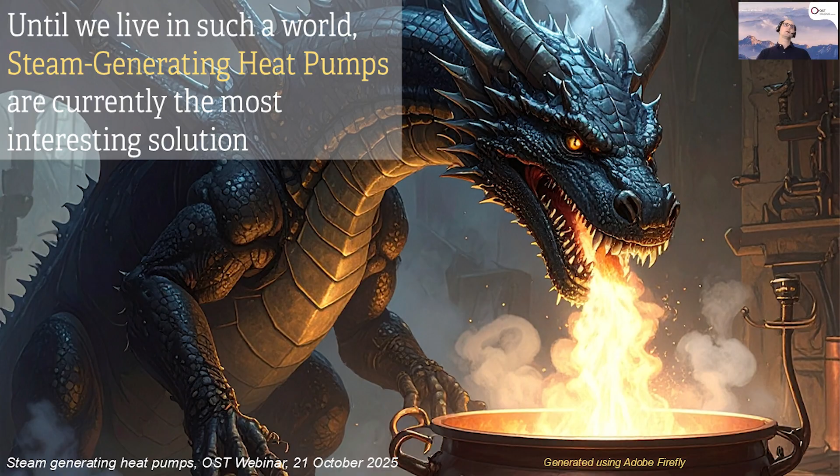Let's start this webinar with my short introduction. We're really happy to present you today this interesting presentation of steam generating heat pumps. If, like me, you love the subject, I'm certain you will be satisfied with our webinar. And if you're not familiar with steam generating heat pumps, I hope you can be as enthusiastic about it as me by the end of the day.

My introduction will be short. I will speak 2 slides about this webinar, then present our Applied Science University, OST, and our Institute for Energy Systems, and then go through the agenda.

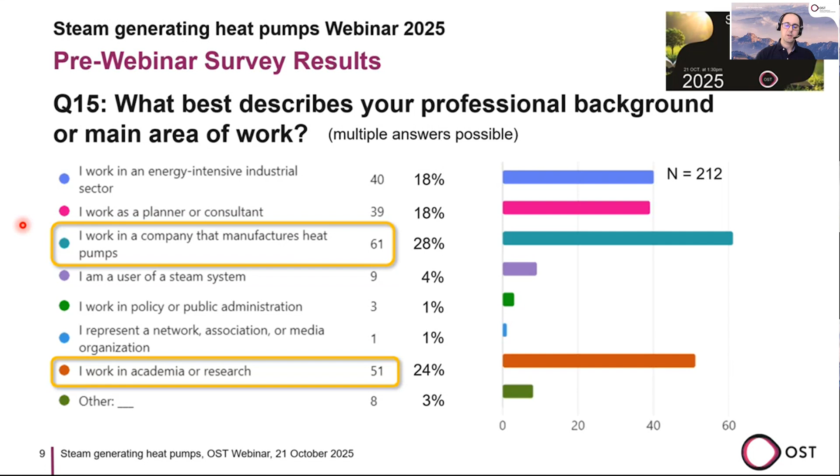I'm really thrilled to see as well around 20% of people following today working as planners and consultants, because I think they are really key people to help speed up the decarbonization of the industrial sector. Most of you are familiar with heat pump technology, or somewhat familiar, so I'm really happy, because that's exactly the audience we were trying to reach.

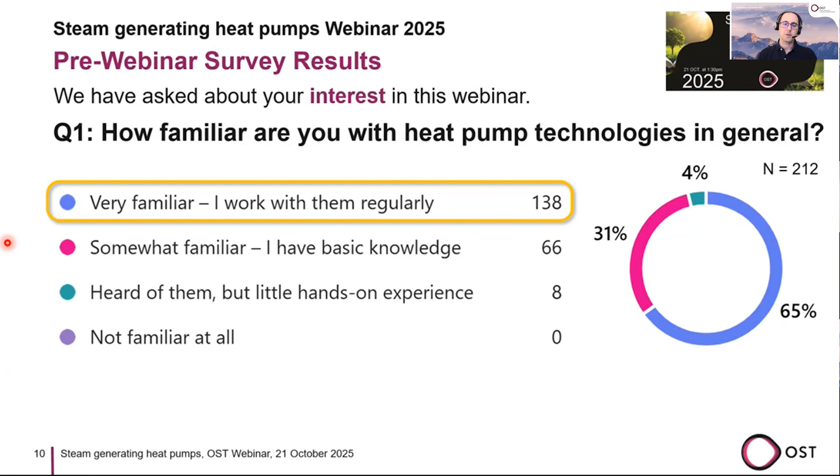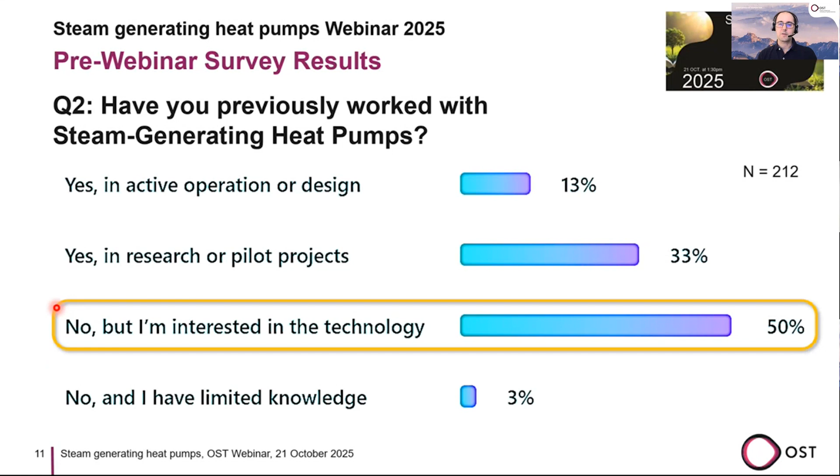If you're among the few percent who don't really know heat pumps, maybe it will be a bit too quick, but I think most people here today will be happy with our content. In terms of specific steam generating heat pumps, most people haven't worked with them, but they are really interesting, so I think this is perfect.

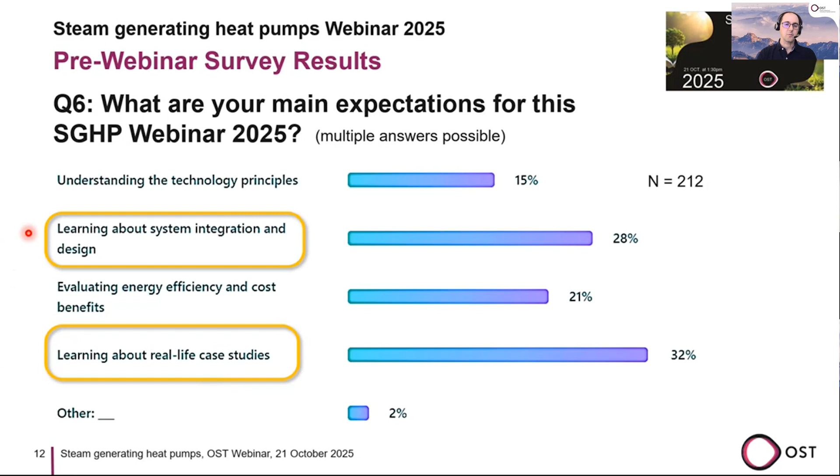What you're looking for in this webinar is learning about real case studies. You will learn about it, so I'm really happy, and I'm certain that you will appreciate today's presentation.

Let's present to you where I'm working. I'm part of OST, the Swiss Applied Science University, which has 3 campuses. The campus I'm working at, with a beautiful view, is in Buchs, which is really close to Liechtenstein, Germany, and Austria.

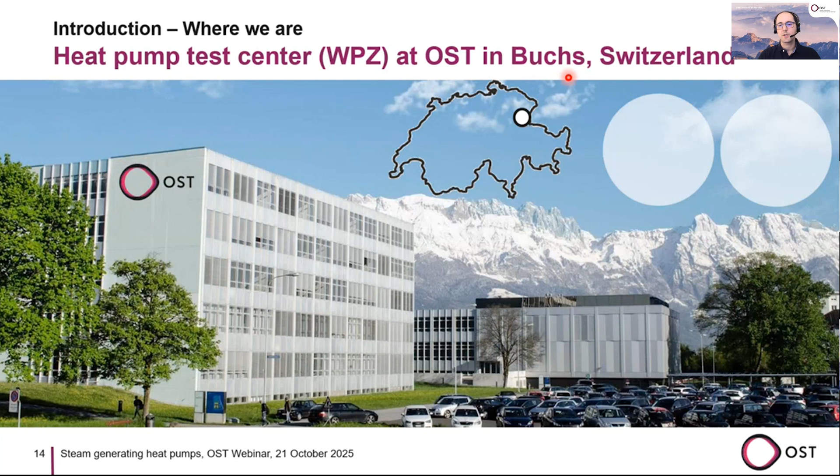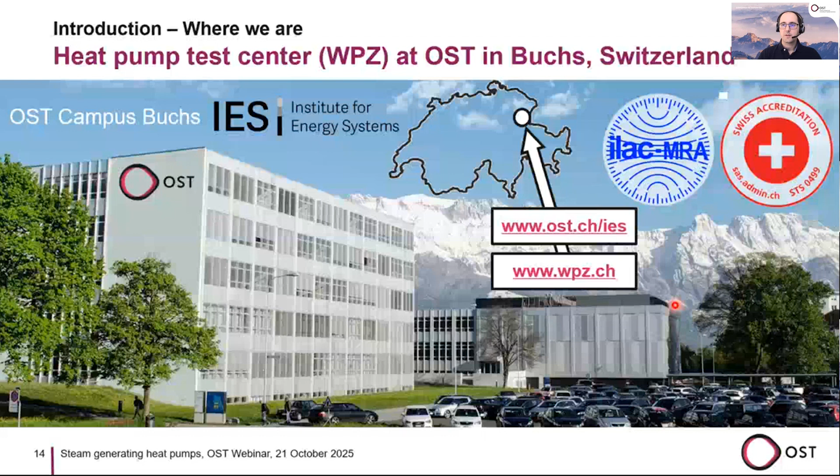In our institute we have 3 groups, one of which is the WPZ, Wärmepumpenzentrum, a heat pump test center which can do certification of residential heat pumps. We work mostly on 2 subjects: residential heat pumps and industrial heat pumps. The power electronics group specializes mostly in mobility, inductive chargers for high power applications such as trucks and cars. We also have people working in energy supply.

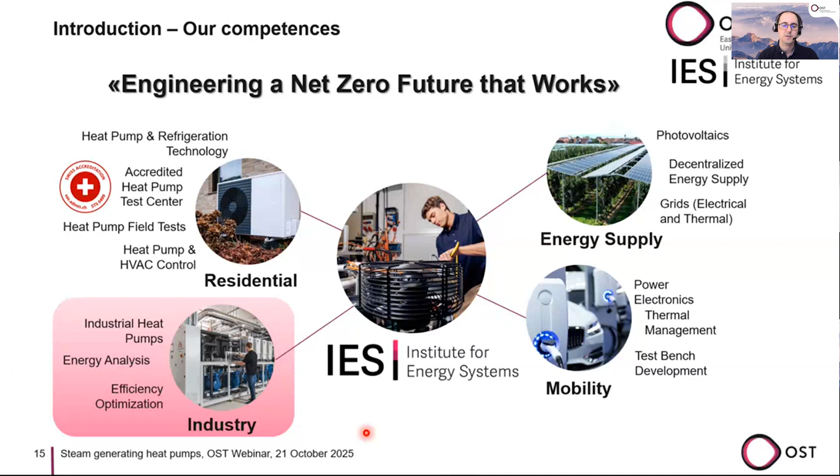Cordin and I have been working in this institute for 10 years on the theme of high temperature heat pumps and steam generating heat pumps for industrial sectors. What we do is mostly disseminate and teach. We do some measurement and testing, as well as advising and consulting mostly Swiss companies, and below that, we try to advance research in the domain.

For example, webinars in 2023 and 2024 - the videos are on the YouTube channel if you missed them, so feel free to have a look. We've also done a lot of presentations, some online, some at conferences, on the subject of high temperature heat pumps.

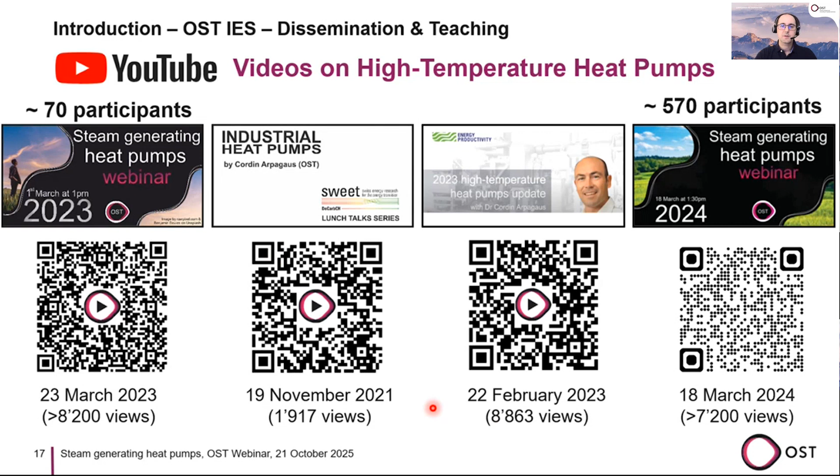In terms of teaching, we've been running for a few years a 4-day continuing education course on industrial heat pumps. It happens twice a year, once in German, once in English. The first 2 days are courses, also available online, which can be interesting for people abroad. The third day is a laboratory tour, and the last day is an excursion. It's a really interesting course that we developed at our institute.

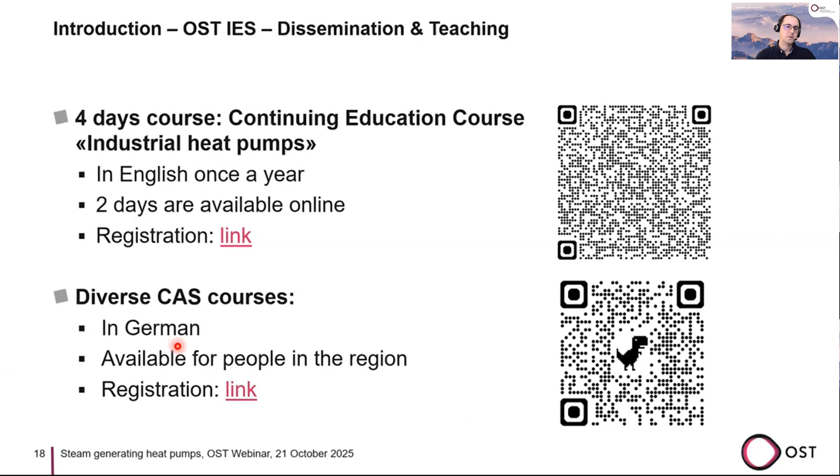For people living close to Buchs, the area where we are working, we also have diverse CAS, Certificate of Advanced Studies courses. Most of them are in German, and the link is provided there.

In terms of advising and consulting work, we just finished a Swiss-funded project called IntSGHP, integration of steam generating heat pumps, where I analyzed 3 Swiss companies, and you can see the results in the link when you download the presentation.

Cordin was part of the HTHP-CH, which was the pendant of Annex 58 on integration of high temperature heat pumps in Swiss industrial processes. They worked with 3 Swiss companies, Elsa, Cremo, HEIG-VD, and CSD Ingenieurs.

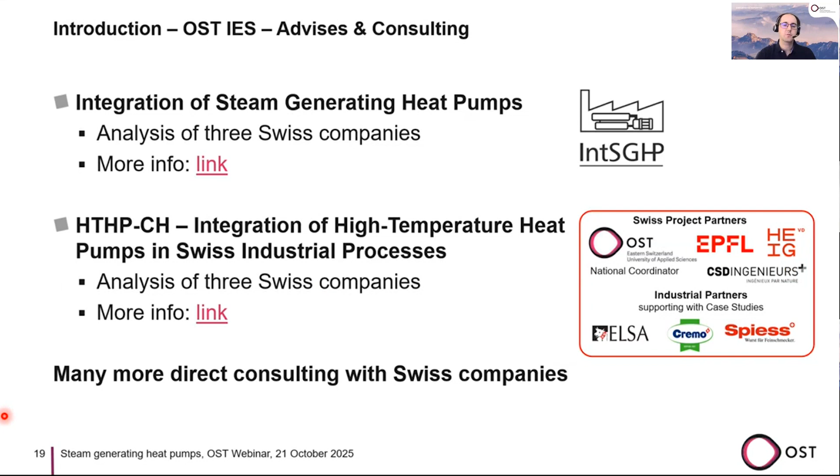In terms of measuring and testing, Cordin was one of the first who published high temperature heat pump results up to 150 using this HFO.

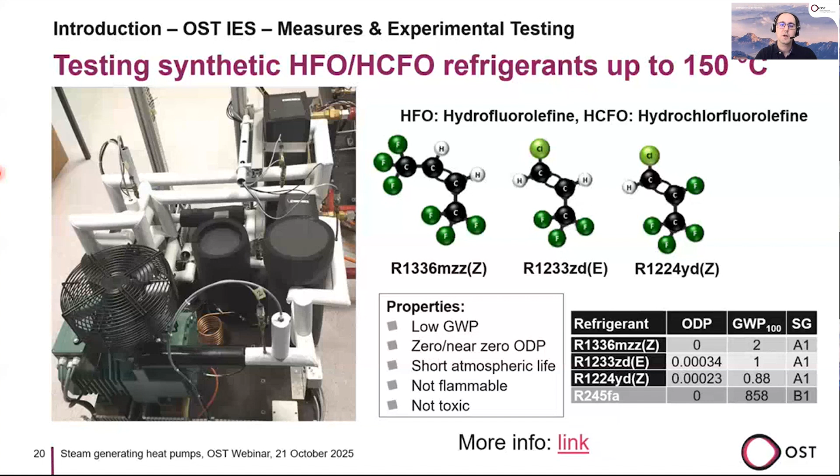We developed as well a butane steam generating heat pump in our lab using standard components.

And once we produce the steam, we collaborate with EPFL. EPFL developed a really small turbo compressor so we can increase the pressure of the steam. That was a project as well funded by Swiss funding.

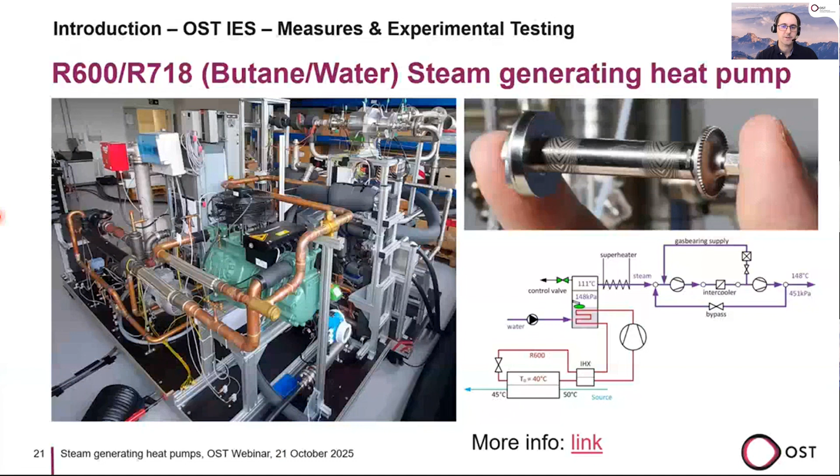So that's for measuring and advancing the research. We are part of a mixture of refrigerant project to be able to adapt the glides of the heat pump to perfectly fit the application in industry. The idea is not to use standard mixtures of refrigerant, but really to customize the best mixture to fit the application in a particular industry.

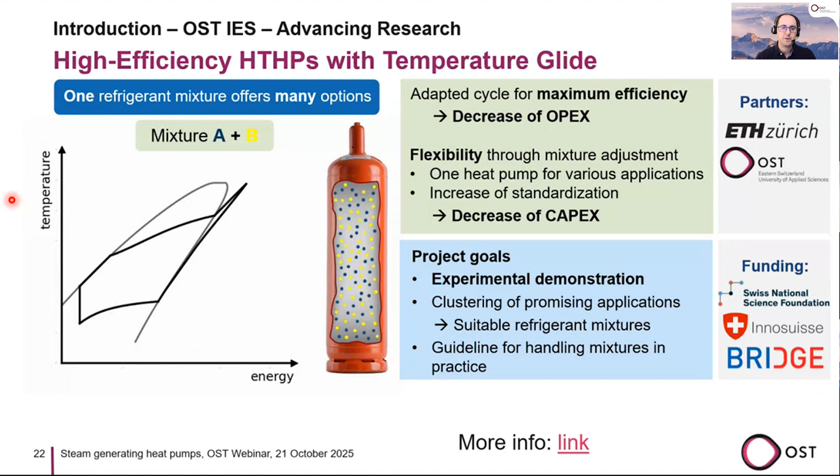We have really interesting results, and if you're interested in the subject, feel free to contact us or look into the link. We are part of various national and international projects like the EU project Push to Heat and Zimba, the Swiss Sweet Decarb project that I presented shortly.

Another project funded by the Swiss National Fund is the Decinel project I'm part of, which is decarbonization of industry via electrification. I just want to speak shortly about what I'm looking at during this project.

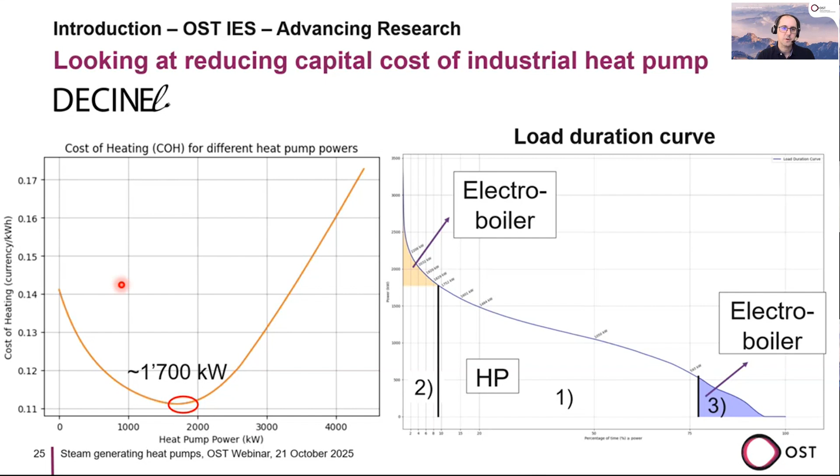You can see that the heat pump optimal size is between 1 and 2 megawatts, particularly for this case, about 1.7 megawatts. The size of the electrical boiler is calculated as well. So that's the cost of heating using electricity for the electric boiler and the heat pump.

And when you see again the first graph I showed you, you can see the line. It's hard, using just this kind of graph of steam demand, to know exactly what will be the most cost-effective heat pump size, and why the curve looks like that.

Because if the heat pump is too small, then we use the electro boiler much more, which has a higher operating cost. But if the heat pump is too big, the capital cost, the capex, is also higher. So this kind of work is what we're doing in our institute.

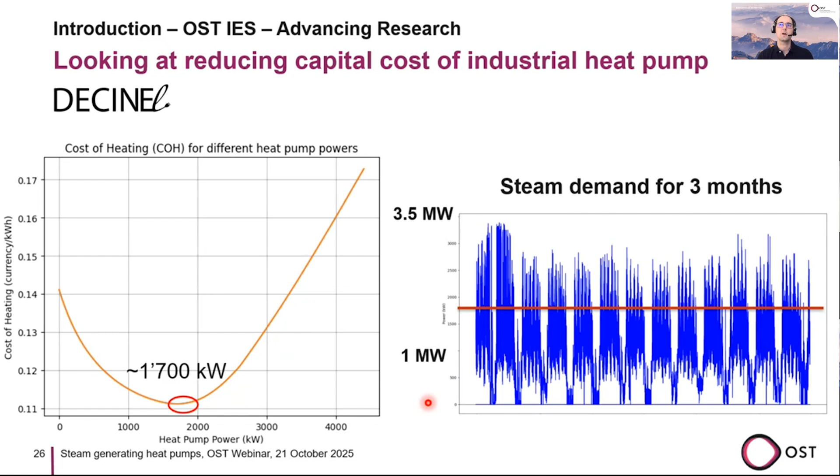That's what I wanted to present for this introduction. Now, in the name of our institute, Corinne and myself, we welcome you to this webinar.